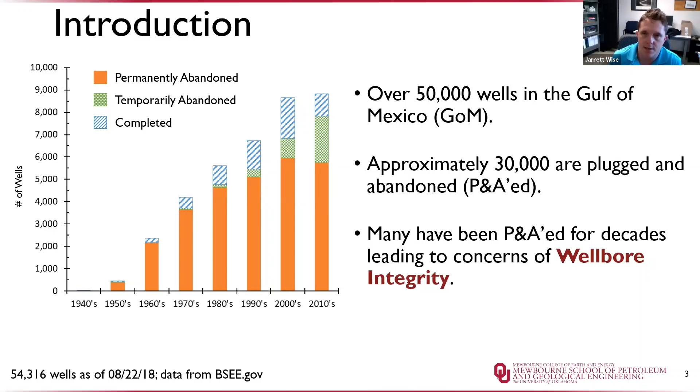So we'll just do a quick bit of background. In the Gulf, there are over 50,000 oil and gas wells, of which 30,000 are plugged and abandoned. And as we can see from this graph, the number of wells being plugged and abandoned, either permanently or temporarily, is increasing each decade. With an increasing number of wells being abandoned, we need to ensure that they're providing zonal isolation and not leaking.

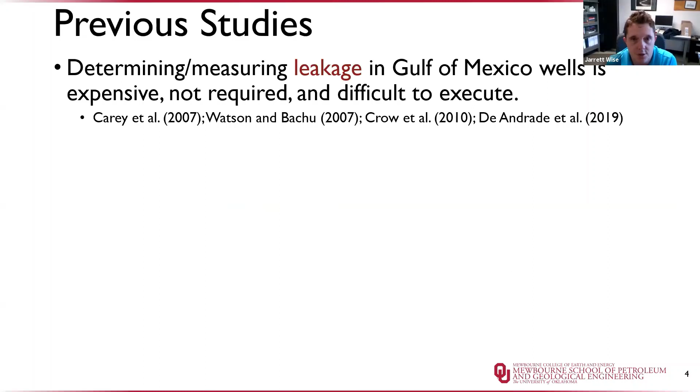So how do we determine if a well is leaking? Measuring these wells directly would be expensive since they are offshore and current regulations don't require monitoring after they are abandoned. And it would be difficult to actually measure any leakage since they're underwater in extreme conditions.

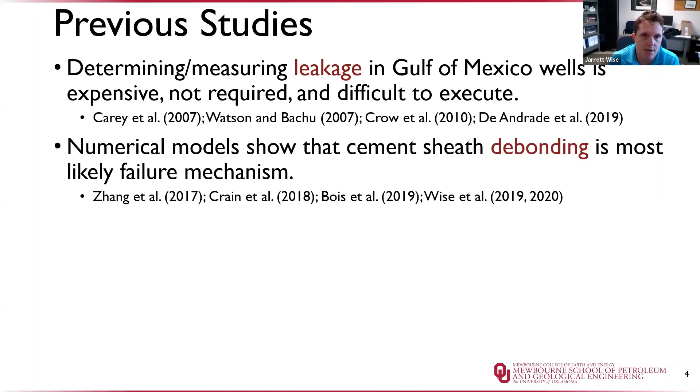So numerical models have been developed to predict which failure mechanisms are likely, and they show cement sheath debonding as the primary failure mechanism. Leakage pathway models force hydraulic microannuli propagation, but they're unrealistic for wellbore leakage scenarios because we're not actually fracking the well, it's more of a natural process. And then finally, different leakage calculators exist in the literature, but the main limitations with them are they either assume arbitrary microannuli or they model water as the leaking fluid.

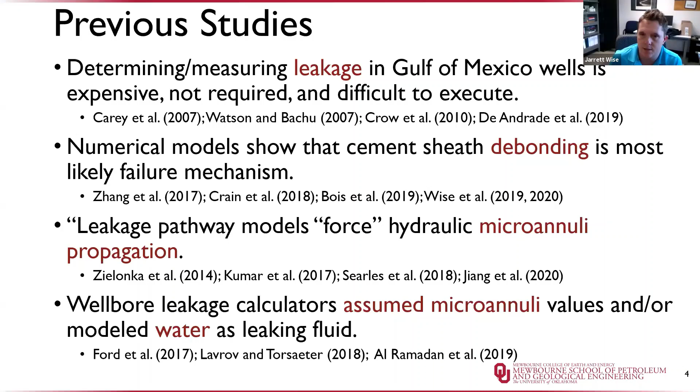Right. So this work was originally submitted in the fall of 2019.

Since then, the pandemic has changed a lot of things and the date of this conference a few times. So we've had some work published in between that's related to this presentation. So kind of just a little overview of the work that we had initially thought of that went into this.

The paper that started us down this path was our ARMA paper in 2019, which determined that cement sheath debonding is the main failure mechanism in these wells. Then we expanded our research to quantify the microannuli due to pressure depletion or temperature cycles.

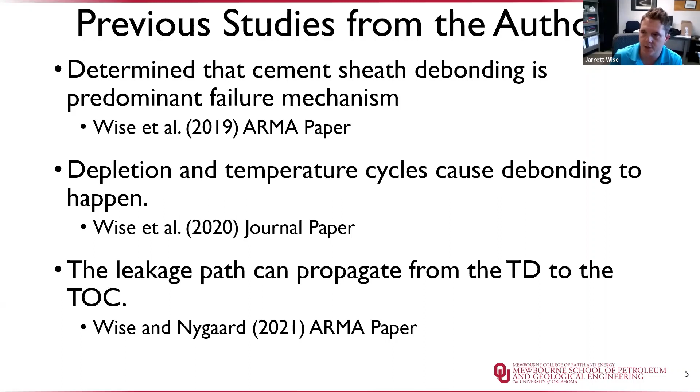Our last ARMA paper quantified the fracture volume from the total depth to the top of cement depth. So what I'm talking about today is a brief overview of these three papers and how they build onto each other, and how we can use these for oil and gas wells or geothermal wells.

Since this work is based in the Gulf of Mexico, a case study well located in the High Island OPD was selected. For this region, there are over 3,800 wells ranging in depth from 93 meters to over 6,000 meters deep, with the majority in the 2,400 meter range.

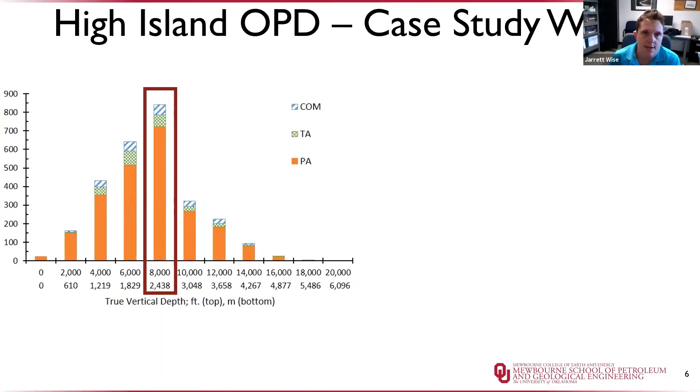The case study well was chosen with a similar depth and well logs were purchased for this well. The figure on the right shows the casing string design, pore pressure at different depths, and the drilling fluid weight from the well log.

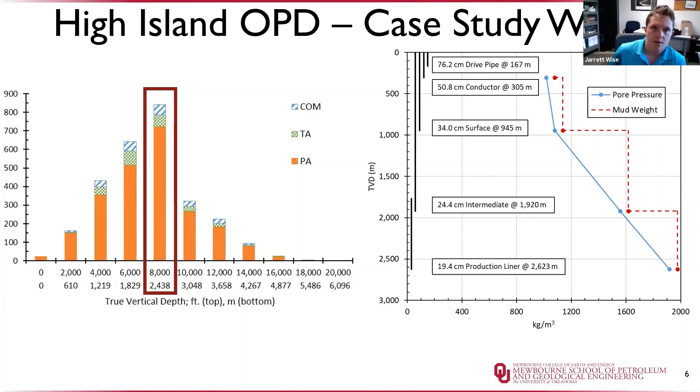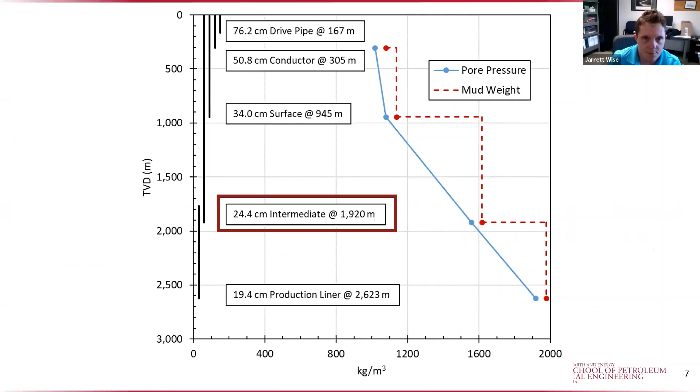For the case study well, we focused only on the intermediate casing string. Based on the well logs, the top of the cement for the intermediate casing string is located at around 792 meters. But based on regulations in the Gulf of Mexico, the minimum length of cement is 500 feet, or 152 meters from the bottom of the casing, which makes the top of cement at this location.

Now we'll look at how these two depths can affect potential leakage in the case study well, from using where the operator chose their top of cement to just doing the bare minimum required in the Gulf.

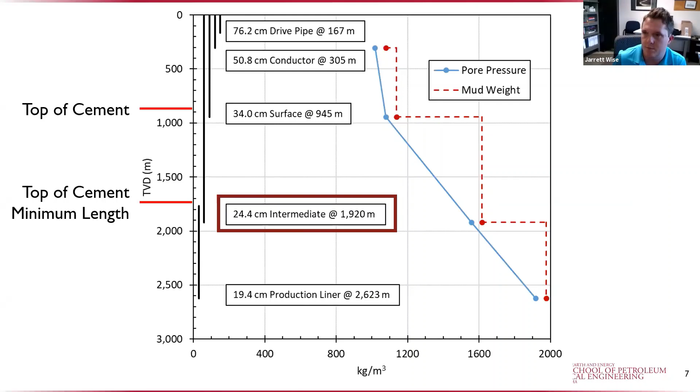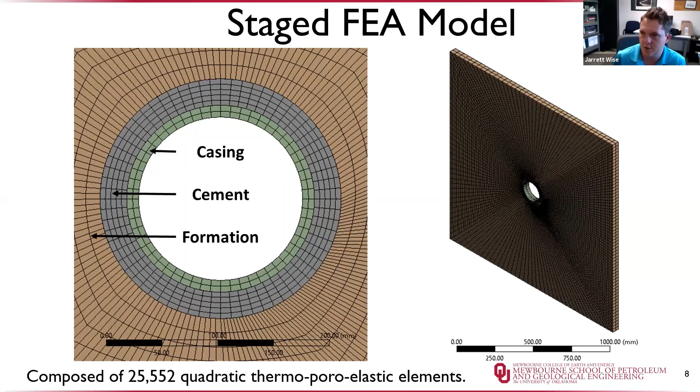The element dimensions are designed so they're smaller in the areas of interest, such as the casing, cement, and near wellbore region, and larger toward the boundaries just to save computational time. The mesh was verified and the methodology was verified using the analytical solution of the Kirsch analytical solution.

Since this model is staged, these are some of the stage steps we used within it. The stage steps start from simulating the geologic conditions with the in-situ stresses and pore pressure. Then the second step consists of the hole being drilled with a fluid weight applied to the rock formation.

The casing is added to the hole within the third step, with the fluid weight applied to the inner and outer surfaces of the casing and rock formation. Then the wellbore is completed in the fourth step, which consists of two parts.

Since the completion of the well consists of putting cement between the rock formation and the casing, we replicated the liquid part of the cement slurry being pumped into the wellbore into all the void spaces, between the rock formation, the casing, and on the inside of the casing. Then we replicated the hydration process by converting the liquid elements into solid elements, incorporating a framework stress and pore pressure.

Then the well is producing, in which the mud weight is removed and production pressure is applied in the well. This is the step we saw in the first two papers, where we're really getting the microannuli formation—when you go from a mud weight to a production pressure over time, which is depletion.

You see that due to the different stiffness between the casing and the cement, you start to get microannuli formation between the cement and casing.

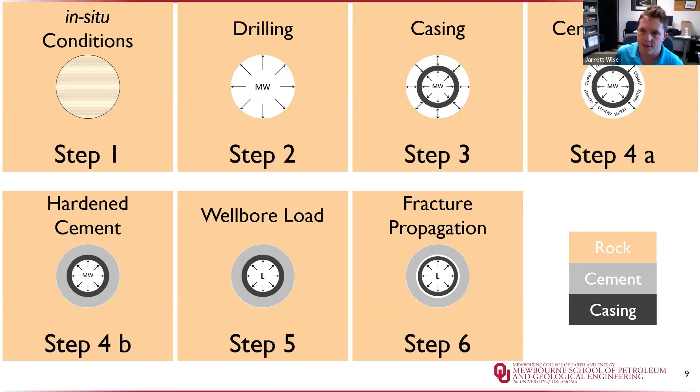So to do that, we had to get creative with our modeling approach. Since a 3,000 meter long wellbore cannot be modeled with the degree of accuracy needed due to memory constraints in computers, supercomputers, all the computers, we had to segment the wellbore into thin sections and created a for-loop that modeled each section individually.

This took the pressures and stresses from the previous section and propagated them up. This way, we were able to assume that the geologic stresses are constant within each individual model while being able to include the gradient of them as the well got shallower.

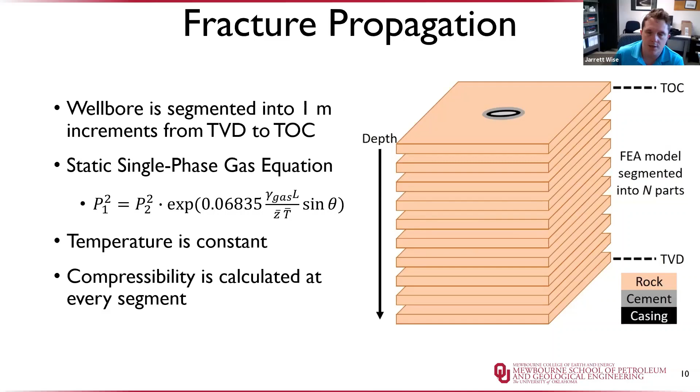So the following figures show the loads and stresses within the model from the simulation depth to the top of the cement depth. The internal casing pressure and microannuli pressure are determined from the static single-phase gas equation. The pore pressure, drilling fluid weight, cement stress, and minimum horizontal stress are all determined from the well drilling reports.

And then the overburden stress is calculated from the Gulf of Mexico correlation. And the maximum horizontal stress is just the average of the overburden and the minimum horizontal stress.

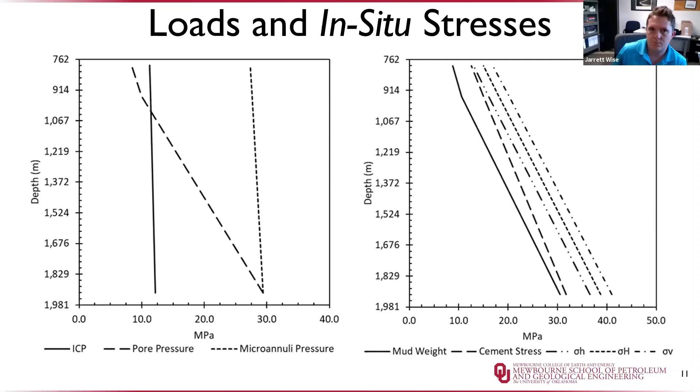So now that we have a model, we'll look at some of the results. To get started, from the journal paper I mentioned earlier, we kept reducing the production pressure to represent a depletion in the wellbore, to see at what depletion percent we start getting a microannuli between our cement and casing.

The figure here shows the microannuli formation at the casing cement interface due to a reduction of pressure, so depletion. We also did temperature for the paper, but today we'll just focus on pressure. We see that the microannuli actually starts to form around approximately a 45% reduction in pressure from the mud weight, and we can see it goes from nanometer size all the way to roughly 70 microns.

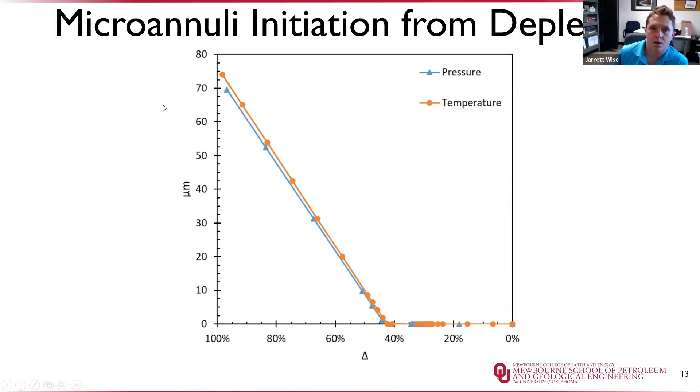So once we got the microannuli due to pressure, we decided to do a sensitivity analysis to see which parameters in the wellbore are really predominant in causing microannuli to form.

First we chose a 29% reduction in pressure, which, as from the previous slide, resulted in no microannuli yet. So this should result in 0. But we see that just by changing the cement Young's modulus, the setting stress in the cement, the hole size, and the casing thickness, we can actually start to get microannuli to form, whereas none was forming at this pressure.

So if we continue to reduce the pressure up to 44%, we see that our microannuli are starting to get bigger in magnitude with the same parameters as before, but now we're starting to add in a few more, like the Young's modulus of the rock and the tensile bond strength.

But we really see that the hole size and casing thickness are the main ones, where they take it from like 1 micron all the way up to about 40 to 50 microns in size. So pretty significant change.

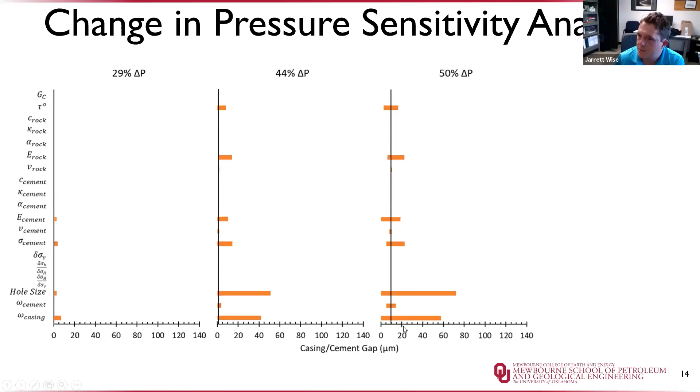Same thing with reducing the pressure down to 50%. We see that the base case has a microannuli size about 10 microns, but now the parameters are starting to change it more, where if you have a smaller hole size, you can actually reduce the microannuli size. But if you have a bigger hole size, you're getting up to almost 80 microns.

Finally, if we reduce the pressure down to 67%, which is, I believe, hydrostatic pressure for this well—so basically the well is completely depleted and just has a water column in it—you can see that the base case has a 30 micron microannuli size, but if you have a huge hole size, you can get up to about 130 microns, or if you have a thin casing, you can get up to almost 100 microns.

Looking at the trends from this sensitivity analysis, we see that hole size and casing thickness are the two main parameters that have the largest effect on microannuli size when you change the pressure. The interesting thing is, especially in the cement community, everyone wants to look at additives in cement to hold up integrity. But from this analysis, we see that the additives in cement, like the Young's modulus and Poisson's ratio, aren't having as dramatic of an effect. The elasticity of the rock is a little bit more than the elasticity of the cement, and you can't change the rock you're drilling in. Same with the hole size and casing, you can't really adjust those very much due to cost and safety factors involved with drilling the hole. So that was one interesting thing we came up with.

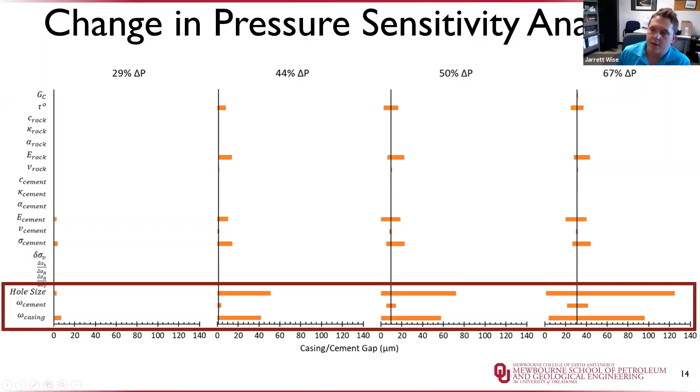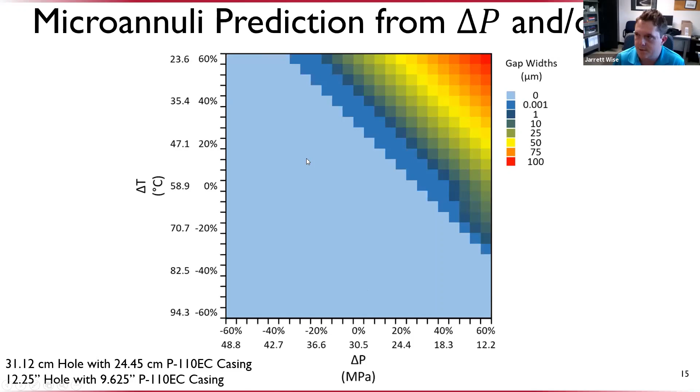So how this affects geothermal, because geothermal you're dealing with temperature cycles, that might be something we have to investigate more, trying to prevent leakage from geothermal. And with the temperature cycles, we're probably going to have pressure cycles too, so those two can compound on each other or cancel each other out. It just depends on the specific scenarios and the loading patterns. Anyway, that's not the point of this talk.

So the point of this talk is, how does the top of cement affect the leakage path? Using the method described a few slides ago, we can determine how the microannuli propagates up the wellbore with the gas fracture pressure, as shown by the orange line on the screen. And for comparison, we used basically water in the fracture, just the pore pressure of the water with water density and all the good stuff, and that's shown by the blue line on the screen.

As you can see, we initially get a microannuli at the bottom of our intermediate casing string of about 23 microns. If we have gas inside our fracture, it actually goes up the cement sheath and propagates, causing the microannuli to increase in size as we get shallower and shallower. The top of cement is about 762 meters, so with gas in our fracture, we're actually getting a complete leakage pathway.

But with water, it starts out at the same 23 microns but actually goes smaller and smaller until it closes up about 1,555 meters, just due to the gravity of water taking away some of the propagation pressure. So we see that with the top of cement that the operators chose for this well, if we have gas in our fracture, we're going to have leakage, but if we have a water-induced fracture, we're not going to have any leakage.

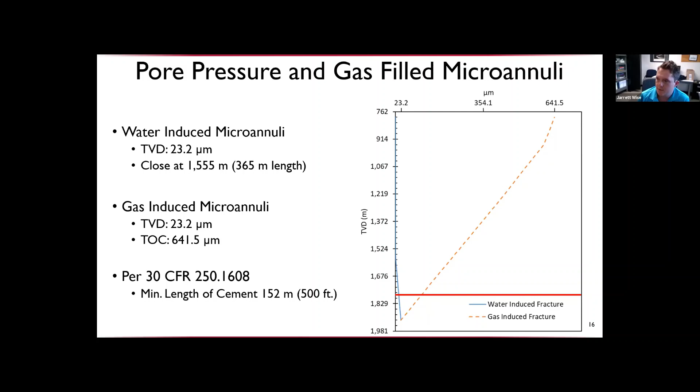But looking at the requirements for the Gulf of Mexico, if you just do the bare minimum cementing requirements, the 500 feet of cement shown by the red line, we actually have a complete fracture path for both water and gas. So if the operators are cheaping out on cement, in this case they would have leakage in their intermediate casing string no matter what the fluid is, whether water or gas.

So in conclusion, the staged 3D model was used in conjunction with the traction separation law and was performed to replicate fracture propagation to the top of cement depth. And the case study well in the High Island OPD in the Gulf of Mexico was analyzed to determine if a continuous leakage pathway was present depending on the length of the annular cement.

So the main conclusions are that changes in casing pressure, like depletion and/or temperature, can cause microannuli to form at the bottom of the casing string. The most sensitive parameters affecting the microannuli are ones that you are kind of stuck with, like the size of the hole and the thickness of the casing.

The 3D model was performed in segments to replicate fracture propagation to the top of different cement depths, and the length of the cement sheath can determine if the well is leaking. In this scenario, the minimum length of cement results in both water and gas leakage, whereas the original length of cement only resulted in gas leakage.

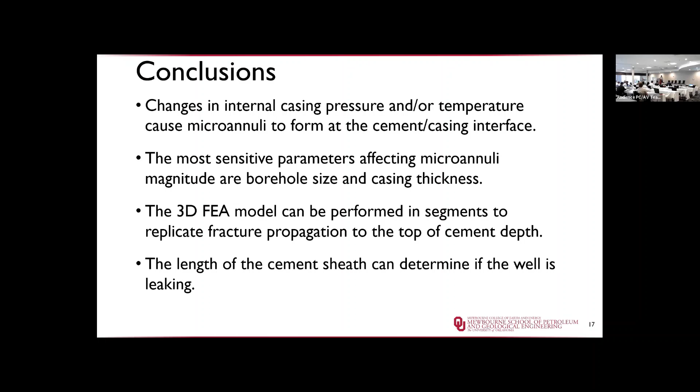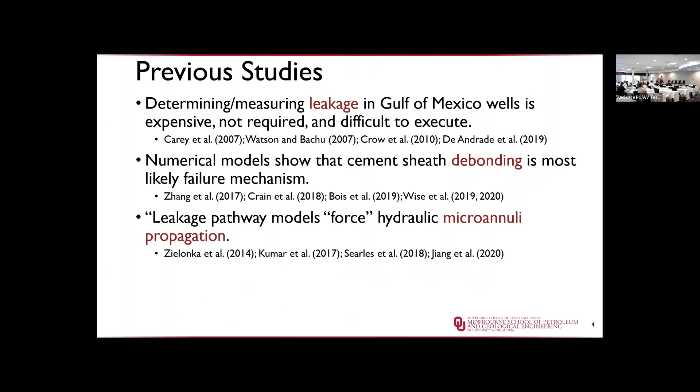So, one more minute, one last question in case you guys have one. I have a quick question, and that is, where would I find the results of this work? And secondly, I know it can be, but we would like to see the results of the thermal side as well, and hopefully extend it to geothermal wells in the future. Yeah, that's very good. Thank you.

So the slide on the screen right now, you should be able to see. The thermal stuff was included in the journal paper, the 2020 journal paper. The first one is just doing a basic sensitivity analysis. Then our journal paper included the thermal stuff. Our last paper went from the bottom to the top of the cement. And then we have a paper in review right now that's looking at the different leakage rates.

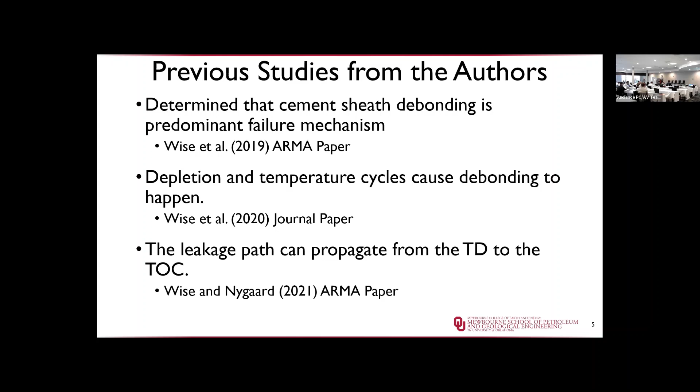Our next paper is on shear bond strength of oil well cement in a carbonic acid environment, and the effects of pressure and temperature.

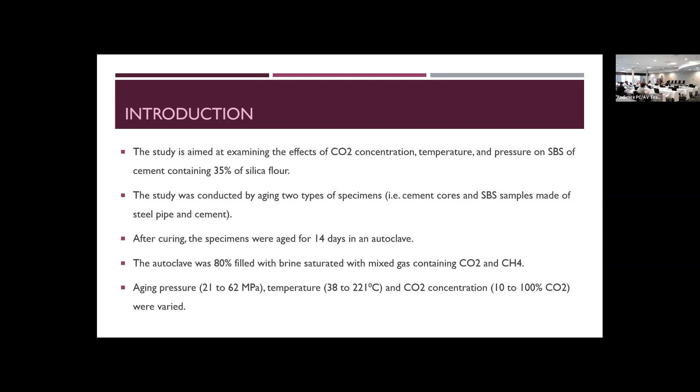If you're wondering why the numbers aren't round, it's because we convert everything from PSI to megapascal. We used 10 to 100% CO2 as a solution in the water, and I will show you how the autoclave looks like.

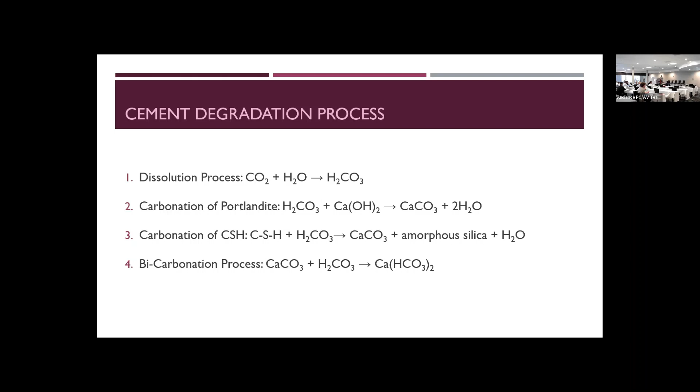Degradation is a big issue, and we've known for a long time that cement degradation happens in the presence of CO2, although there's a lot of discussion right now about what is the right model for degradation. The important point here is that in the cement we have carbonation of Portlandite and carbonation of the CSH phase. These two are very important for the degradation process that I will show you.

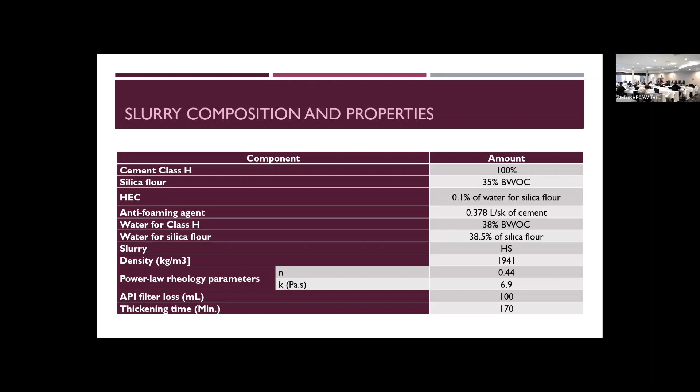For this we used cement class H, and we added 35% by weight of cement of silica flour, along with other chemicals, trying here to replicate a given recipe that was proposed to be tested. That's why we have the anti-foaming agent and some other additives. I don't want to go into detail on the recipe itself since I don't think it's that important in this case, but the most important part will be the results I'll show you.

We have cement cores and shear bond samples that have been used. For the shear bond samples, we used metal pipes, tiny short pipes, with a length of 4.45 centimeters, diameter 1.88 inside and 2.67 outside.

These pipes were clean, we poured cement into them, put them in the autoclave, and then exposed them to the CO2 environment.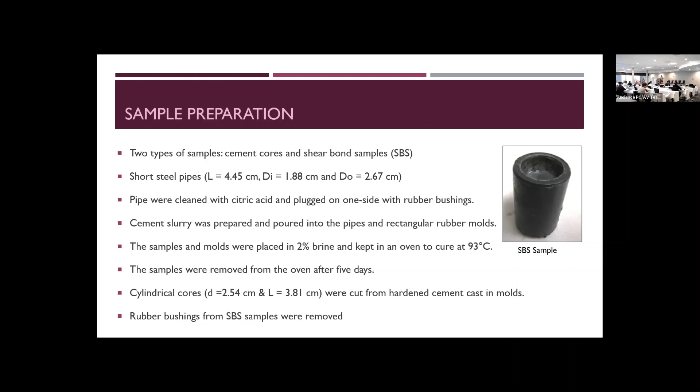Especially for this cement, for the bonding samples, we also used reference small samples, which were originally rectangular samples that we then cored to get cylindrical samples used for testing. I will show you some of the testing results.

Although it's probably not the best way to do CO2 aging, we actually wrote a very intensive paper comparing different methods of aging cement in different cells and so on. This method is the most common one you'll find available.

So we use an autoclave, and you can notice the gas phase on top and the water below. We were pumping the gas on top, and because of the pressure ratio in the autoclave, the gas would start dissolving in the water. We used a heating system where the water was circulated inside, and by circulating the water we were also accelerating the dissolution of gas into the water.

We also used methane as another gas to control the concentration of CO2 for this. So basically, we did not use air at all in the system for these experiments.

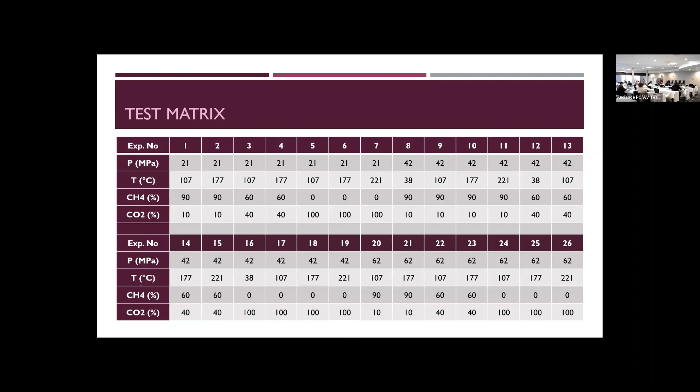Now this is a test matrix, it probably looks a little complicated. It's just to show our students were working 24 hours a day, and if they didn't finish the test, they would spend the night finishing those tests. We've done very intensive experiments, and a lot of experiments were discarded because the results weren't good at the beginning, especially during the pre-testing and analyzing of the system.

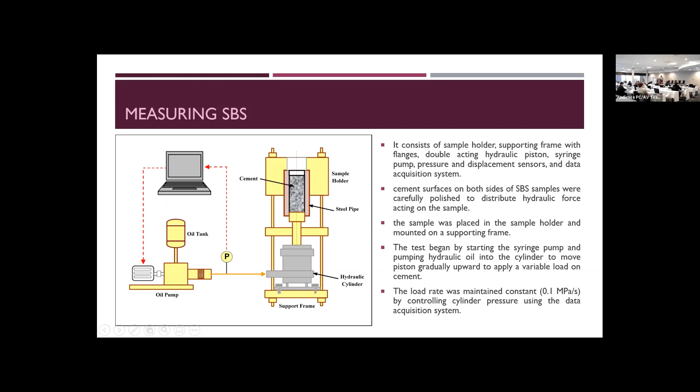The shear bonding strength test was done using a setup specifically designed for small samples, using the push-out method as presented earlier. The cement was poured inside the pipe, giving us a very controlled contact surface between the cement and the pipe, which is why we prefer this method compared to others used in the past. By increasing the axial force, or push-out force, with a very controlled speed, we were able to record the data.

The data for this test was recorded up to a maximum value, and whenever the sample was failing in terms of bonding strength, we stopped the test. As you may remember from my previous paper, we continued debonding until the entire cement sample was pushed completely out of the steel, just to learn a bit more from the experiment.

With this in mind, we noticed some very interesting facts for these samples. Keep in mind, these were 14 days in autoclave. You'll notice the shear bonding strength is pretty high compared to 1 day, which is typically in the range of 1 to 2 megapascals. We used temperatures of 107 degrees Celsius and 177 degrees Celsius.

And for those who are really geothermal enthusiasts, we have 221 Celsius as a very high temperature. By comparing this data, you'll notice that at really high temperature with 100% CO2, we are losing a lot of bonding. The bonding of the cement to the metallic surface is pretty low compared to all other temperatures. I'll show you in a separate slide that we've noticed a very interesting dependence on temperature.

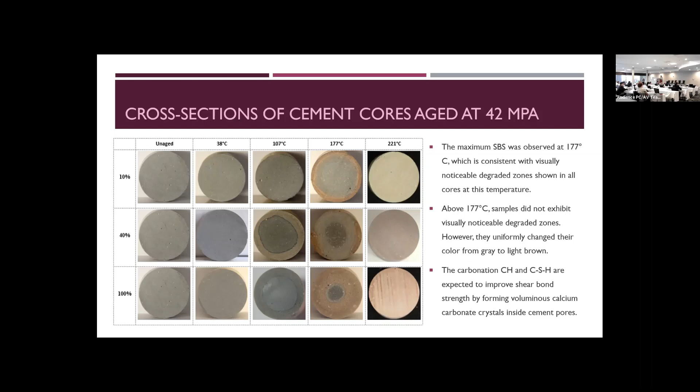That's one of the things we'll show you later when we've done some other types of investigations. We also measured the volume expansion after aging, just to look at what happened with the average volume change. You can see here that this is for 42 megapascal.

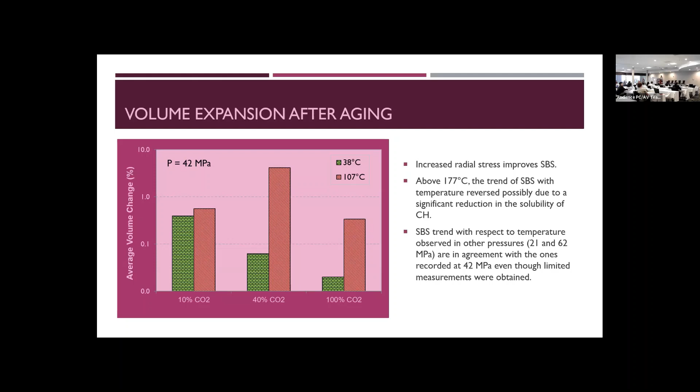We noticed some changes here: by increasing the radial stress, we improve the shear bonding. That's a very interesting element because, as we discussed yesterday, there's cement shrinkage as well as the thermal expansion effect of the cement. Actually, all the trends we observe on shear bonding strength with respect to temperature are in agreement with others recorded at 42, 21, and 62 megapascal.

This is just a little bit about the solubility of CO2 in pure water, which defines what 100% versus 10% CO2 means for us and how that worked in our system. Obviously, temperature will have a high effect on that, meaning that at elevated temperature the CO2 solubility will be different than at room temperature or atmospheric conditions. That has to be considered in what happened in our setup with this system.

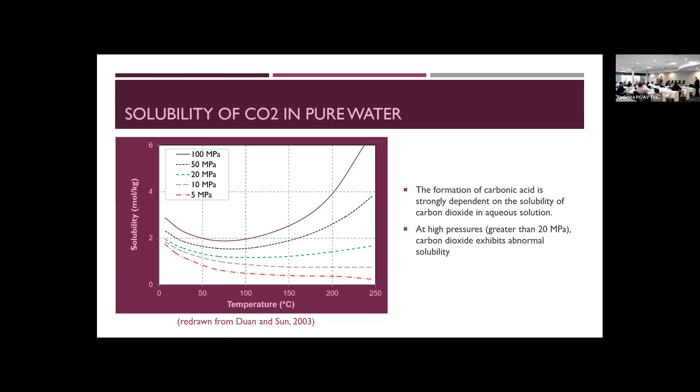We measured the porosity of the samples and noticed some changes. Looking first at 10% CO2, at 107°C we noticed the lowest porosity change. Whereas at higher temperature, especially 221°C, we observe the highest porosity in the cement compared to others. This porosity trend was similar at 40%, but totally reversed at 100% CO2.

Probably this is because porosity reduction confirms the dominance of carbonation over the leaching process, but bicarbonation increases the porosity due to the removal of calcium CO3 crystals forming the pores. We believe this effect needs more detailed information, but it is a clear effect of CO2 on the performance of our samples.

If we compare on the same graph the samples for porosity as well as for shear bonding strength, you can notice a porosity trend with the minimum at around 107 degrees Celsius. And we have another trend on the shear bonding strength with the maximum just around 177 degrees Celsius. So they are basically reversal in the tendency.

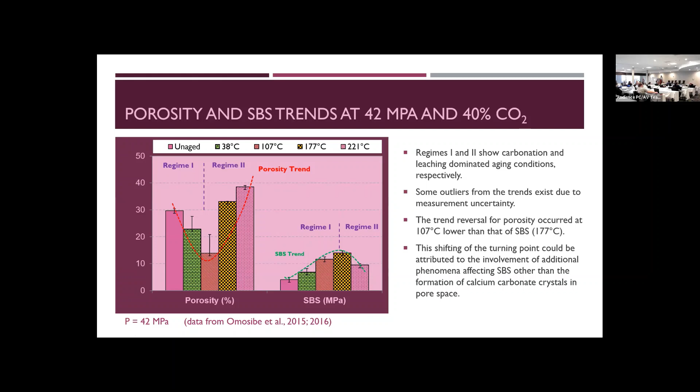In order to look a little bit more at CO2, or if you want acid penetration in the cement and how this looks, we use the standard phenolphthalein solution that will be applied to the specimen, and by looking at the color we try to get an idea about how deep and how fast this will penetrate into the system.

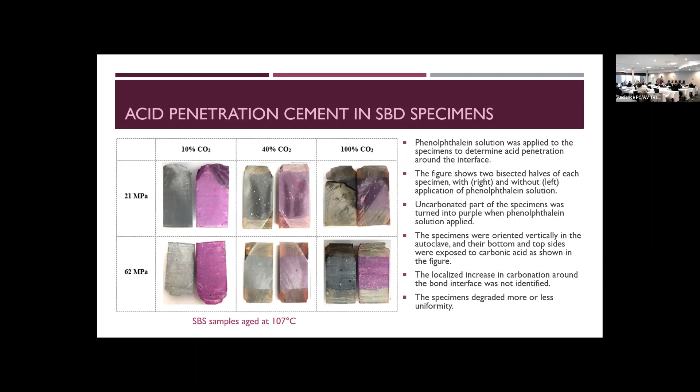This might have some implication on the role of CO2 in the bonding process. Now we look and try to get spectrum peaks for the samples to identify whether we can locate some of the elements in the system.

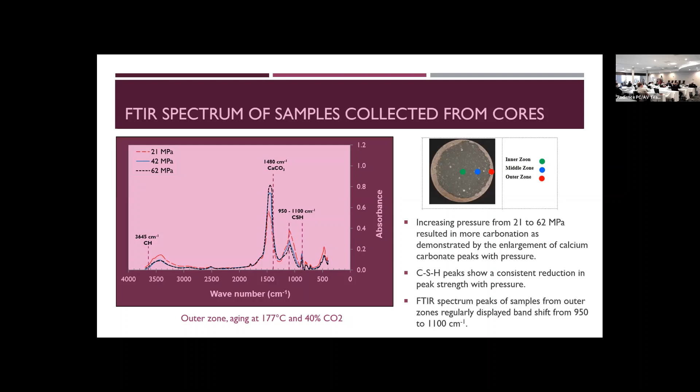As you can notice here, we use samples that have been exposed at 21, 42, and 62 megapascal. We observe that the peaks are pretty much identical, with, however, a reduction of some of the elements at 21 megapascal. You can see we have relatively lower components here, and the maximum was observed at 62 megapascal, which is something that was actually expected for our testing.

Furthermore, if we move to the consumption of the C-S-H phase, we notice that this was typically consumed completely at 107 and 177 degrees C due to the enhancement of ionic transport in the system. That's at least what we believe.

Also, in the middle zone at low and high temperature aging condition, we noticed that the C-S-H phase was still preserved, which is still debatable to a level of how fast, how deep the CO2 as a carbonic acid will penetrate a sample which will be much bigger than our samples, which obviously we have not done in this system.

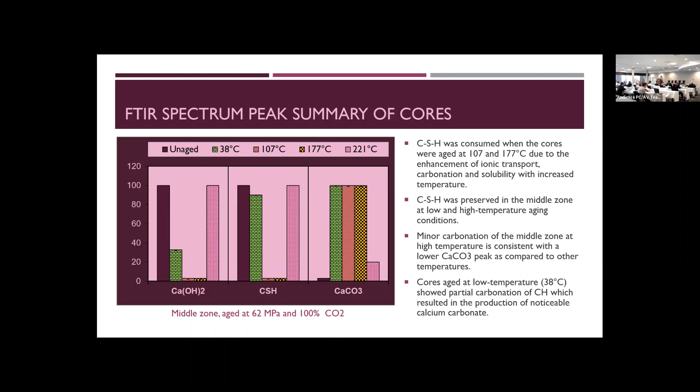Furthermore, the cores which were aged at low temperature, like 38 degrees C, show just a partial carbonation of the CH phase, where we noticed a little bit more calcium carbonate in the form. So you will notice here that 38 degrees C is on the lower end for our system. This is probably interesting from the chemical point of view of cement carbonation process as such.

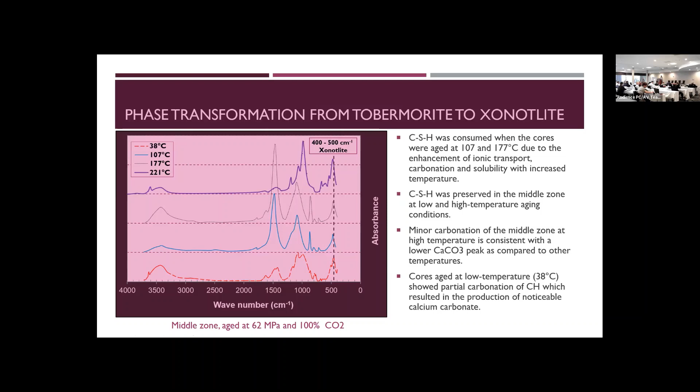Also, in order to identify what happened really in the C-S-H phase, we try to look at the conditions for the formation of polymorphs. In most of the cases, we concluded that it is the most prominent form of C-S-H that exhibits good bonding properties. If we can control some of these changes inside the cement, we probably will achieve better bonding through this development of the tobermorite gel inside the system.

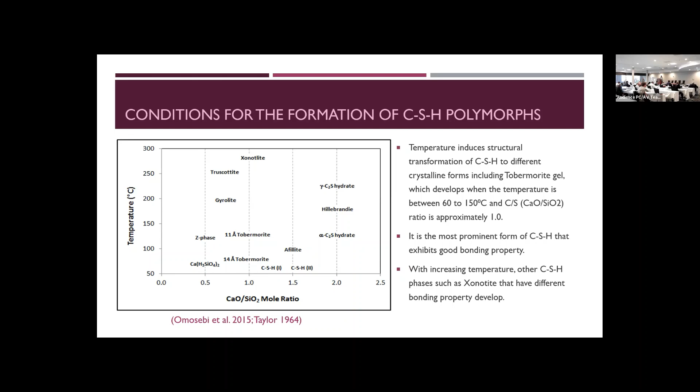The temperature will show either a trend of increasing or decreasing the bonding, and that's actually the most complex question we have in most of the cements. That's why we believe that almost every cement we put in a well needs to be first tested for interfacial shear bonding strength, to determine whether it will develop better bonding at elevated temperature or low bonding.

If you remember, most of my tests with pure neat cement have shown a decrease of shear bonding at elevated temperature, whereas some of the tests here showed actually a trend of increasing bonding with temperature increase.

Now, the pressure has shown relatively less effect. We believe that what pressure actually will do to the cement is, first of all, compact the cement and compensate some of the shrinking of the cement in the system. Nevertheless, as our third parameter, the CO2 concentration seems to have an effect on the bonding with our system.

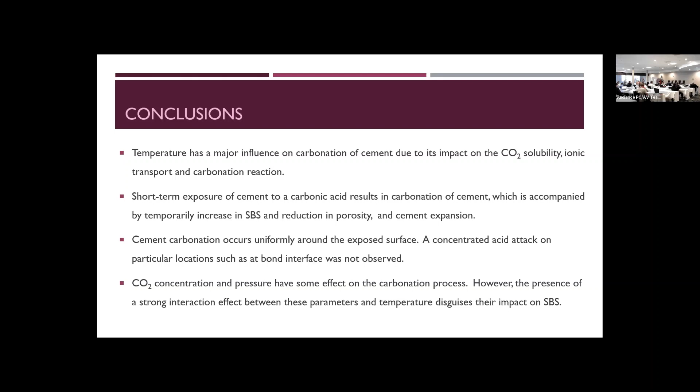And I'm open for any questions that you guys may have. Okay, questions? We got one here. Yeah, me again.

A comment. In my previous life, when testing for carbonation in cement systems, we noticed that once the carbonic acid hit the cement at the interface, it densified the cement system. So maybe that's helping you improve the shear bonding, because the initial effect of carbonation is to densify the cement and reduce its permeability. The issue is once the carbonic acid exhausts and you hit that same specimen with fresh water, that's when you dissolve the system, because calcium bicarbonate is not available, or those phases I've never seen in solid form. They're dissolved in water. So that's how your system begins to reduce, and that's how CO2 can continue dissolving your cement. That's the one comment.

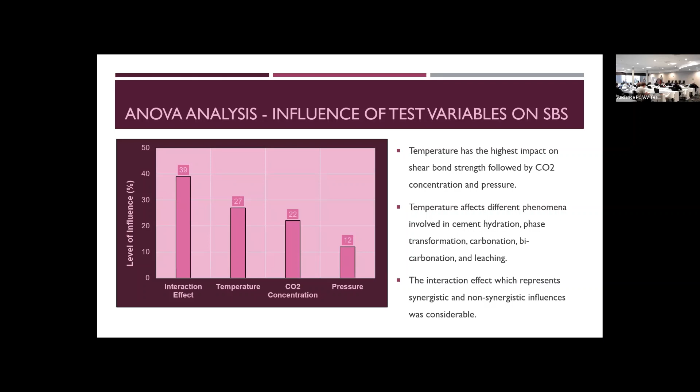No, this is a parametric test. We didn't perform a non-parametric test. We are very much aware that the size of sample will definitely affect the results, especially if we want to upscale them to the real world. But the project, the way we started, was in particular to be able to do some comparison. And that's why we believe that although the size of the sample is small and may not be fully replicated for real situations, at least the test that we have done here, as you can easily follow in such a graph, shows a very important tendency of the bonding.

If you look at the data here, high pressure doesn't really improve the bonding at all, which means that, as the ANOVA was telling us, pressure is the least significant parameter in this process. I fully agree that a non-parametric study will be important, and our laboratory right now is trying to expand the testing. We are varying sizes now from as low as half an inch to almost 4.5 inches for the cement, and we are trying to see whether the geometry itself plays a role, and whether that geometry change can be at least scientifically explained.

Right now there is only one paper out there that has done some geometrical impact on the shear bonding strength, but the samples were between 10 millimeters to 20 millimeters, and they've shown that the shear bonding strength will increase or decrease with the geometry change. If you remember my paper yesterday, we've seen the same with our small scale data - we got around 4 megapascal. By moving to larger 3-inch pipes, we got something like 1 megapascal. We are still trying to identify why this happened.

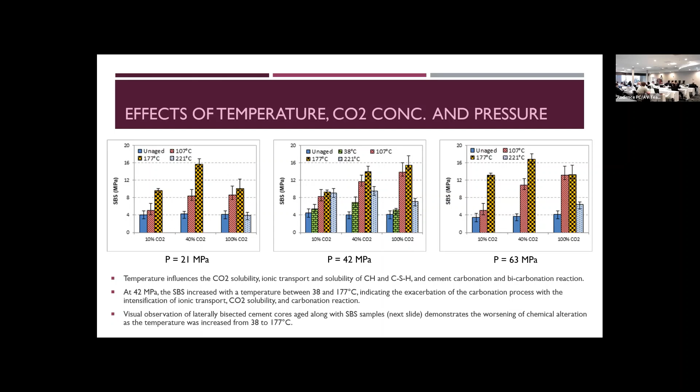CO2 in just DI water or was it brine? Because that would make a difference, I think. I don't remember anymore, but I think it was water, so DI water used for the test.

I have seen some papers not with carbon dioxide, but just neat cement, and as a function of temperature, the shear bond strength increases up to 200 degrees C, and then it starts reducing. So in this study, I'm kind of struggling with whether it is the CO2 that is actually strengthening it, or is it just the temperature which is strengthening it?

There is only one paper, and probably you're talking about the same paper that has shown this trend of bonding increasing up to 200 degrees C. This cement is designed for high temperature, so it's supposed to be stable up to 250, 300 degrees C. We don't expect that the cement itself will suffer from the temperature. We believe that the combination of CO2 and temperature had that effect on the system.

However, some of the papers I've read also on shear bonding, particularly with neat cement - I believe that because they've done the test at elevated temperature rather than cooling down the samples, those tests were still having some effects of thermal expansion of the system that were captured as part of the shear bonding strength, and was not the pure bonding strength. It's just my personal opinion, but I think those tests are very important, though the trend needs some attention.

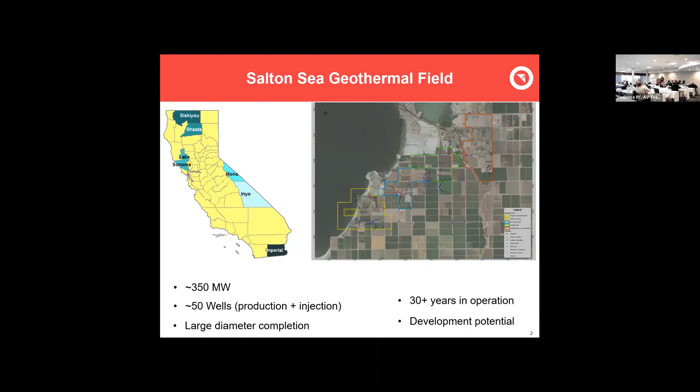Quick background on the reservoir conditions: temperature is 550 to 600 degrees plus. I say plus because there was a well drilled over 700 degrees Fahrenheit that got a little scary, close to supercritical, and was just plugged at that time. But wells like that still exist up there and might be developed in the short term.

The total dissolved solids, the TDS, is 25%, so extremely saline brine, very corrosive. The low fracture gradient, like most geothermal fields we work in, is about 0.65 to 0.7 PSI per foot, so it's always a challenge for us anytime we cement any string of casing.

There's H2S and CO2, and that CO2 zone is a little shallower. Just north of where we have most of our wells there's an old CO2 plant that was operational in the early 20th century for production of dry ice, one of the largest in the US. So good for dry ice, not so good if you're drilling wells in that shallow section, down to about 1,500 feet for the most part is where that zone is. There's also high permeability and a lot of fractures, so something we also have to contend with in any cementing operation.

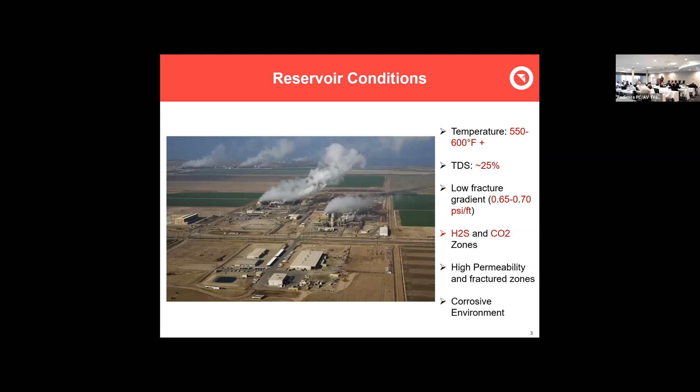The corrosive environment - you can see here an example of some carbon steel casing. Recently we pulled some carbon steel casing as a hang-down liner, an L80 string, one year in production, one year in contact with flowing brine, and we were lucky to even pull that string. So for production casing, carbon steel really cannot be used. We use a titanium grade alloy or Inconel 625 for production wells, and for injection wells we can go with 2507 duplex stainless steel.

To give you an idea, in particular for production casing, we measure flow rates in thousands of pounds per hour, but we have one well equivalent to producing 200,000 barrels per day of brine. So just the amount of flow through them, and how robust it needs to be to maintain that production for extended periods of time, is really crucial.

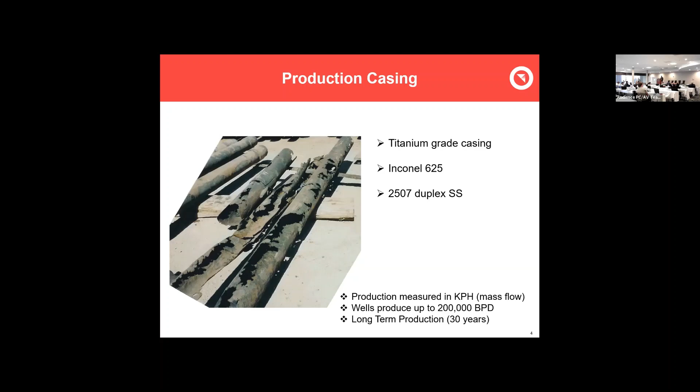Just a quick overview of our well design: we cement a 30-inch surface casing followed by a 24-inch intermediate string. That 24-inch intermediate string's primary function is to cross and isolate the CO2 zone. For that string we run Halliburton's Thermalock cement for added protection from the CO2, but we do see a lot of issues in our casing at that zone, across that interface with the CO2.

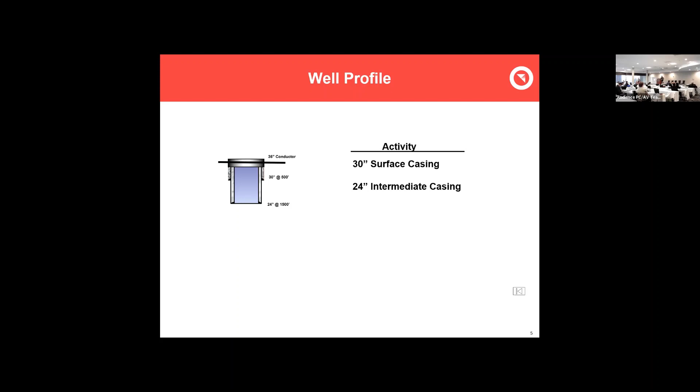Here's an example. We drill our next hole section, and we do two-stage cementing for our production casing, the 20-inch string. Usually we're cementing that down to about 3,000 feet, and we do this in 2 stages.

We use a simple 2-stage DV collar, mechanical, no ECP. It's not very fancy, it's really just to ensure we get a good first stage. We run that DV below our outer 24-inch shoe. No ECP, partly to avoid any channeling or contamination up in the casing-to-casing annulus during our first stage, to keep that area clean and focus on getting a good job on our second stage in that casing to casing.

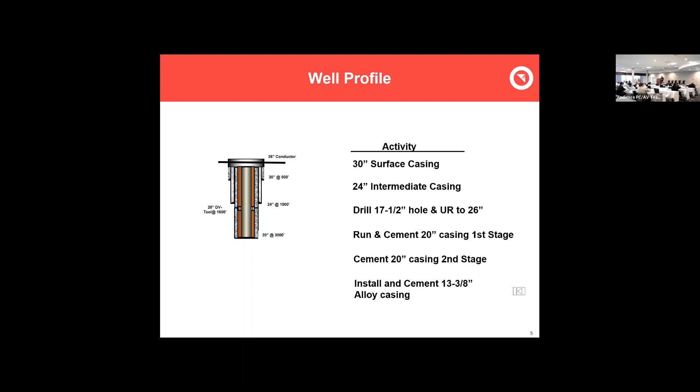Our alloy string, some of those alloys are as much as $3,000 a foot, so we're extremely cautious anytime we cement any of those, regardless of practice. In this case, we actually do a full casing to casing cement job, no outside risk of any formation exposure. We make sure we cement that string purely casing to casing, then complete the well, typically in 12 or 12¼ inch open hole.

Historically, some of the problems we've had with our cement jobs is poor cement quality—channeling and also losses of cement. A lot of times we're in fractured rock and simply can't get enough cement, so we have losses throughout the job. Some of the channeling is caused by poor casing centralization, so a lot of times we now minimize our deviation in the wells.

We run ultrasonic bond logs for most of our 2-stage jobs and also our alloy or high-end casing jobs. You can see the example on the right, the liquid phase—you can really see the channeling we had in this particular cement job. This is a highly deviated well, at least by geothermal standards, and you can see some areas with free water from the channeling going on here.

We run logs on most of our jobs so we have a good feel, though some of it is relative—sometimes they all look bad, but we've had logs that don't look great yet we've had a lot of success, operational for years with no issues. In this case, this is an example of something that was not good. The other problem is collapsed casing. A lot of what we've discussed is long-term effects of cement bond and these things.

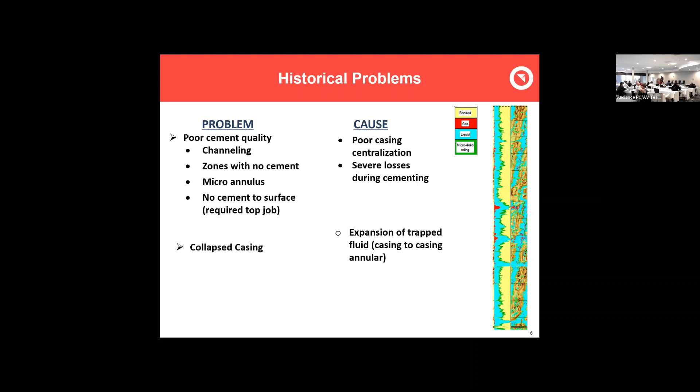Our considerations for doing these two-stage jobs include low fracture gradient and fracture zones. Some of the benefits, especially in that second stage, are very minimal losses, even though we're somewhat in open formation. We've had minimal losses during that second stage, and ideally it's to minimize the potential issues in that casing-to-casing annulus, making sure we get a good cement job in that section.

We allow the use of 2 different cement slurries. For the most part, we try to cement with as low a density as we can that still has good compressive strength, but we're looking at anywhere from 13.5 to 15.5 pounds for most typical jobs.

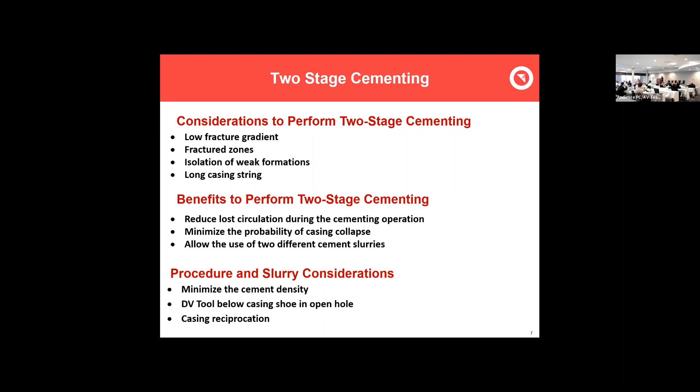For future considerations, we've talked a little bit about foam cementing. I wasn't around for it, but we have wells that were cemented with foam successfully in previous years. Operationally, it can be a little cumbersome sometimes, and I think we've gone away from that recently.

We've also done liner tieback successfully. The last well, I think in 2009, was a successful liner tieback job.

The last two I have here, reverse circulation, is something we haven't tried. We've been looking into doing some reverse circ jobs, but that really comes down to operational expertise. We've had discussions about doing these, but one issue is having the confidence of the people actually pumping the job.

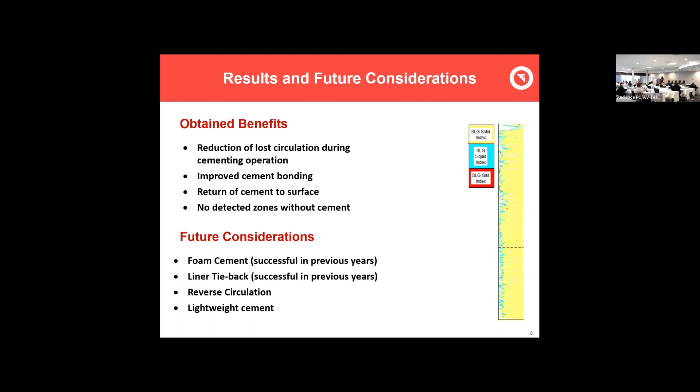The other option is lightweight cement. I've looked into that a little, but we've had very little success there and haven't really ventured into that area - that's really all I have. So this was just an overview of the field, and moving forward, hopefully there are a lot more wells drilled in that area. Thank you guys.